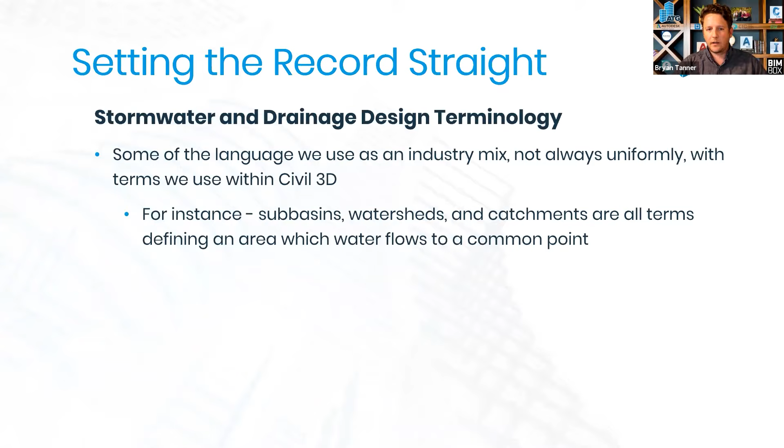However, all that said, we also have to think about our Civil 3D objects and the terminology that Civil 3D actually applies to those terms. In the case of catchment, a catchment is the object type that Civil 3D creates for a drainage area. And although I didn't specify it in the quick PowerPoint I put together, watersheds are an analysis style inside of a Civil 3D surface.

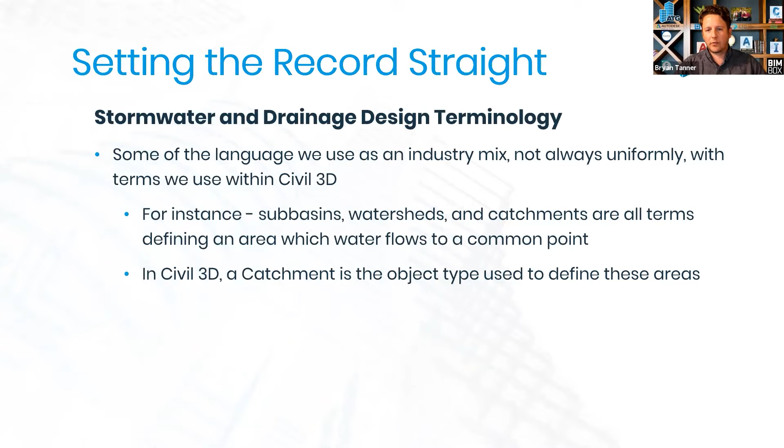So watersheds do exist as a term inside of Civil 3D, but it's a reference to a style used for surfaces, whereas a catchment is an actual object type with properties and settings that can be imported and exported to other analysis software for those drainage areas.

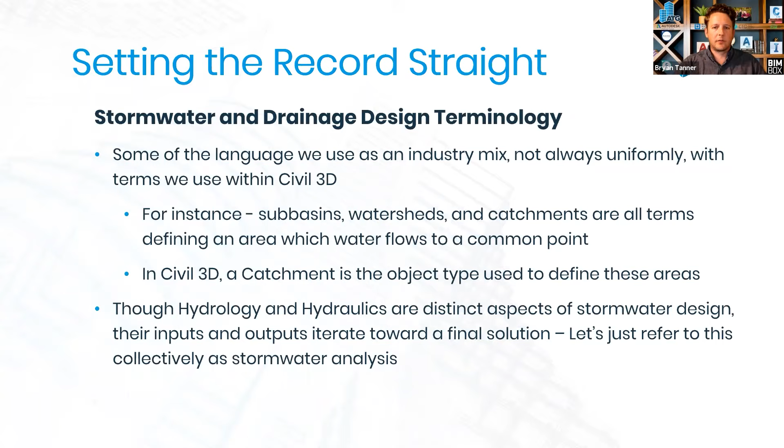Regardless of the kind of information we're talking about today, hydrology, hydraulics, this should all collectively, in my opinion and that of others on our team, and I'm going to credit Kyle Groves a little bit here, be known as stormwater analysis. Yes, some of it's flowing through pipes, some of it's runoff on the surface, but it's all going to iterate back and forth toward the same end goal of handling that rain event, regardless of where it's being collected from and outflowed to.

Now, Civil 3D itself can be set up to work better for us whenever it comes to developing these watershed areas, these catchment object types, and just drainage as a whole. We want to develop files that we can quickly export and for that matter, import to and from other design software, other analysis software. We've got Hydraflow, hydrographs, we've got Storm and Sanitary Analysis just within the Autodesk suite, just within the tools that are available to us with our existing Autodesk licensing.

InfraWorks is another one that we can tap into some analysis tools there for HEC-RAS and things of that nature. So we've got some tools available to us depending on our licensing structure within the Autodesk suite. Not everybody uses those Autodesk applications for their hydrology or hydraulic analysis. With that in mind, it's going to be a mixed bag. Your mileage may vary on the objects that we create within Civil 3D and how well they translate or transform between those other non-Autodesk applications. So keep that in mind.

We want to configure our template. We want to configure our drawings to communicate with as much other software as we can. And using the catchments and using certain settings within the pipe networks, we can accomplish a lot of that within our Civil 3D templates. We'll talk more about that as we go along.

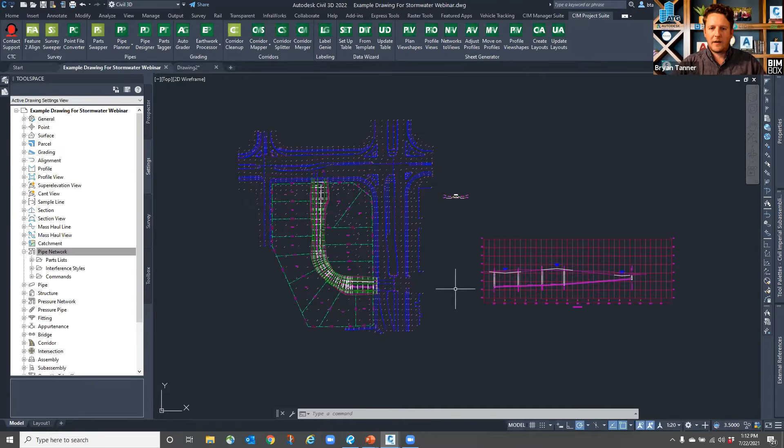Let's talk shop about the type of drawing we're in right now. Not a huge site, but we've got an existing site surface and a proposed finished surface in this drawing for a very basic corridor.

When we're doing our stormwater management design, depending on the regionality and project extents, sometimes we are also grading the site outside of the corridor. Sometimes our only part of the project is the site itself outside the corridor, and other times we have blended existing and proposed conditions.

For the sake of this webinar and the types of procedures you'll run into while doing stormwater design, we're actually going to paste our existing and proposed together. Why? Because ultimately that is our finished conditions. If we're going to analyze the entire site, we need to understand not just what we're constructing, but the areas outside of that which are contributing into our project and out and away from it.

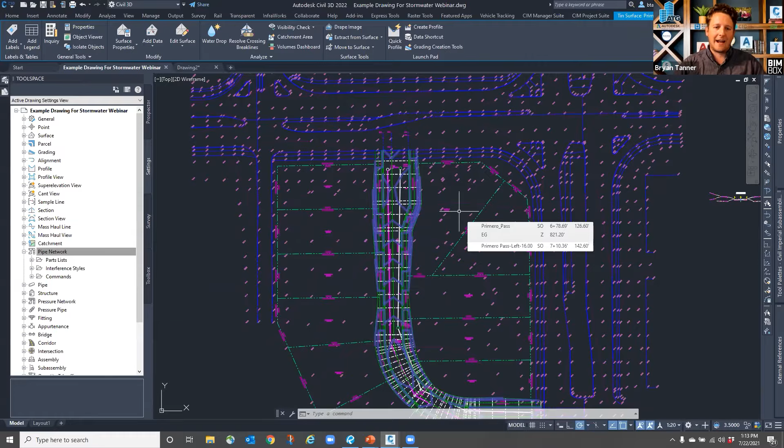Again, depending on the type of project and the area you're in, we may have different requirements on what we're including in that analysis.

So the first thing I would do in a drawing, and mind you, we're not working in a template. We are using the ATG starter template and the styles included in there on this data set, but we're not starting from scratch. We could spin our wheels quite a bit trying to start from survey field to finish and then design and then start our watershed and catchment creation. So admittedly, there is some level of completion baked into this.

What is not baked into this, what I specifically pulled out, is the creation of certain styles that are going to help us out along the way. Because while our ATG starter template is great, I didn't want to pre-bake too many things in that we need to learn about through the webinar.

So the first thing I may do in this drawing, so I have a complete picture of what my drainage conditions are going to be, is make sure I have a complete composite finished surface. On my Prospector tab under surfaces, I have an EG that's probably out of date or needs some changes, but I'm going to create a new container surface for my composite finished grade.

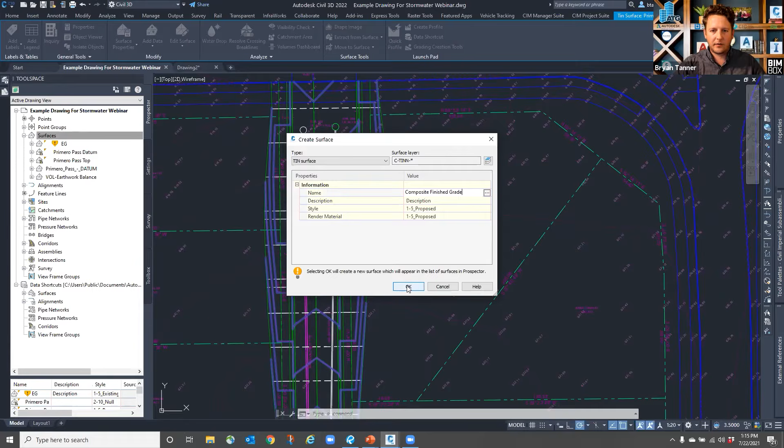Name things as descriptively and consistently as your organization needs. Add descriptions where needed. I'm going to go ahead and flip this, and I'll leave it at the 1 to 5 foot major and minor increment style.

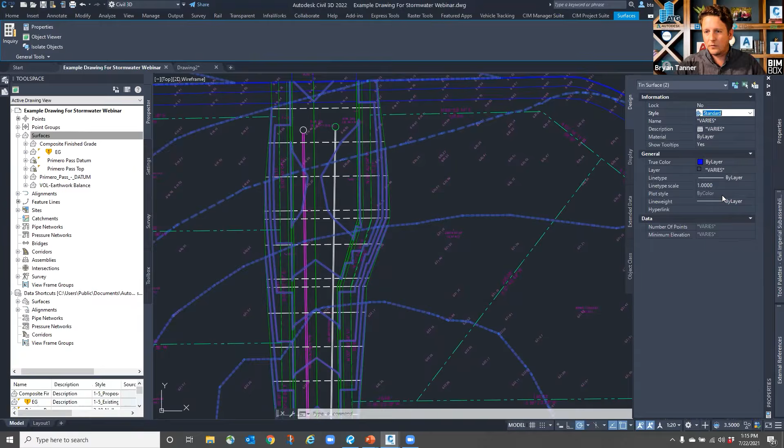I'm going to go ahead and turn off my existing and proposed surfaces to a no display style. If I had one, I may have removed that in preparation as well. So I'm just going to go to standard and modify that - actually I won't need to, because it's just the boundary and we can work with that.

So I'm going to take that composite finished grade surface, and the first thing I'm going to do is paste my existing and proposed surfaces into it. I'll expand the definitions, right click edits, paste surface, and choose my EG and my top finish grade surfaces into that. Luckily, with the order I selected them, everything came in the way I would expect.

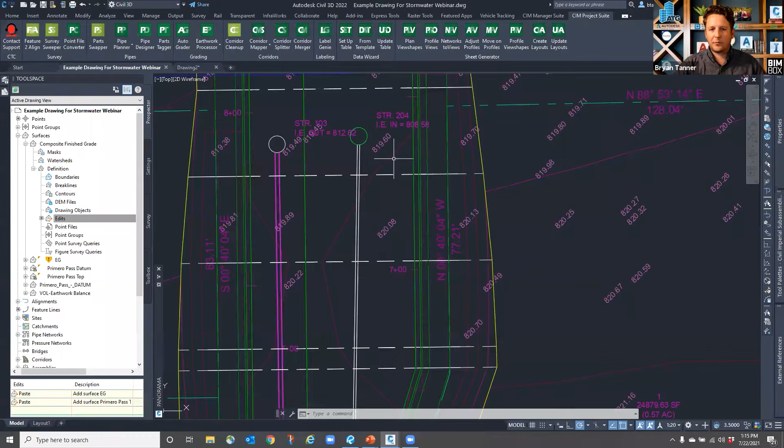Where I have design, my design surface takes precedent and I see those design contours. Outside the limits of my design, I pick up the existing contours. If that's not the case - if you pasted those surfaces in and for whatever reason all you see is the existing - it's because the construction order of your surface is not correct.

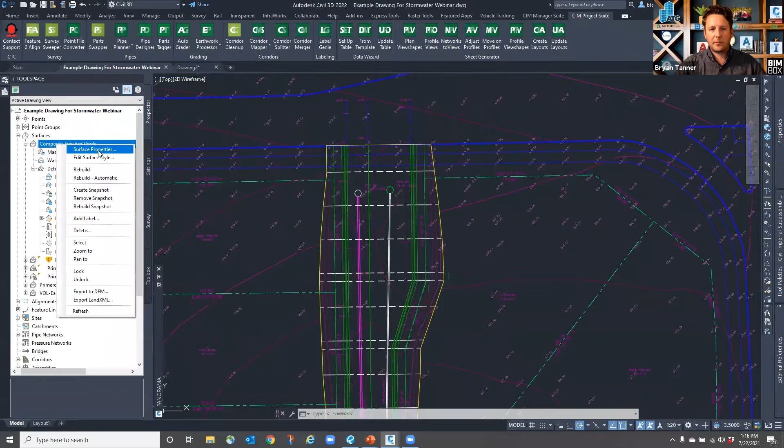So just to cover all our bases, if I right click and go to surface properties, or select the surface in the drawing and go to surface properties from the contextual ribbon, I can go to my definition tab and ensure that the last thing constructed takes precedent over what was operated before it. My design surface is at the end of the list, so it's working the way I want.

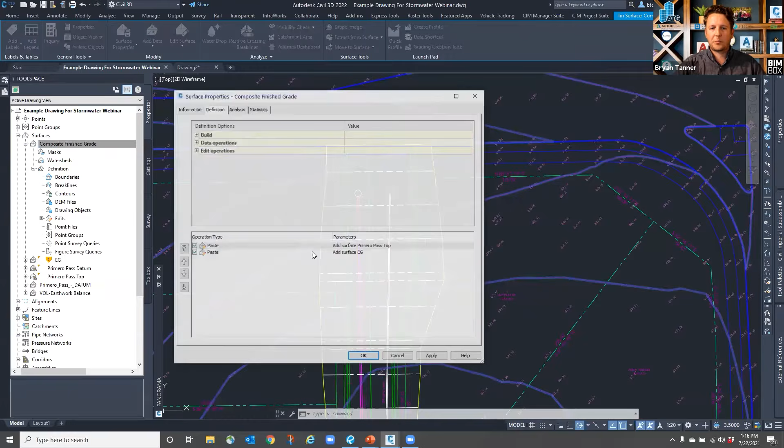But I'm going to shift it for a second just to show you how this could have been done wrong and how we would resolve it. We'd go back to the surface properties and change the paste order of those surfaces to ensure we actually represent the finished constructed grade of our site.

Now we've got a great site. We've got a great finished grade surface that we need to develop some stormwater design off of. From a previous webinar, I do have some stormwater designed in here. Is it designed at the right location?

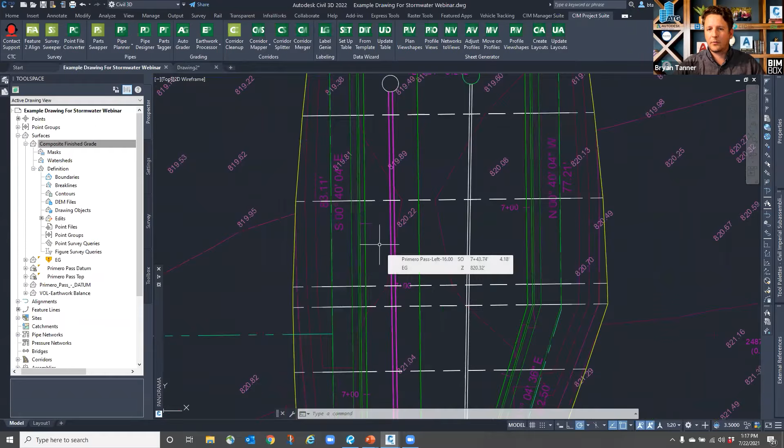I can tell you just by looking at the contours, if this was my finished design for the corridor, no, it's not at the right location. I need an inlet over here, and probably down at the other end of the corridor some other low spots needing inlets to collect stormwater runoff. But for today, I'm not going to mess too much with the actual stormwater layout. We're going to talk about surface runoff and determining where our pipes need to be assigned, and how to calculate catchment areas, volumes, and time of concentrations.

So with that surface active, I need to find where my drainage basins are. By definition in Civil 3D, I need to find where those catchments are. There are a few ways to go about this: we can either create a catchment object or create a watershed style.

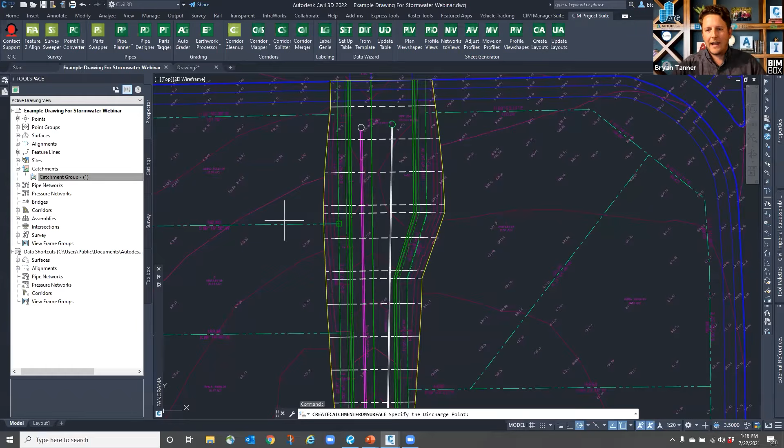Civil 3D has the ability, from the Prospector tab under Catchments, to create a catchment group. I'll create one as a quick example. After the catchment group is created, we can right click and create a catchment from surface, and it will automatically analyze that surface and try to find all of your basins. The problem is there are a lot of assumptions being made — we're already being prompted to specify a discharge point, but we don't know where that is yet. It's assuming information we don't have available.

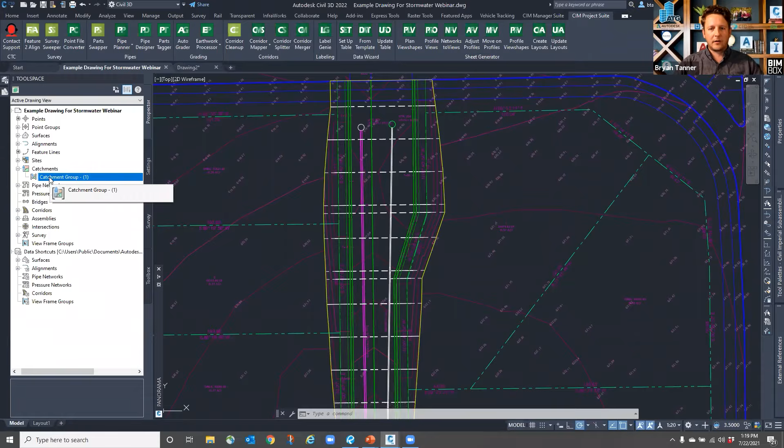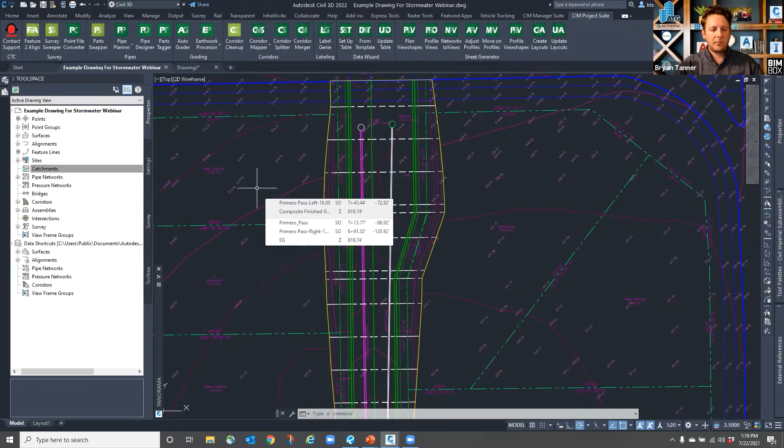So I'm not a big fan of creating catchments off of surface information unless I've already done some preliminary exploring and digging into the actual surface data first. I'm going to delete that catchment group for now and not create my catchment object from the surface. Instead, I'm going to do some prep work so I have better data to work off of for my catchment objects, my flow lines and flow paths specifically — developing some tools and using analysis styles of my surface.

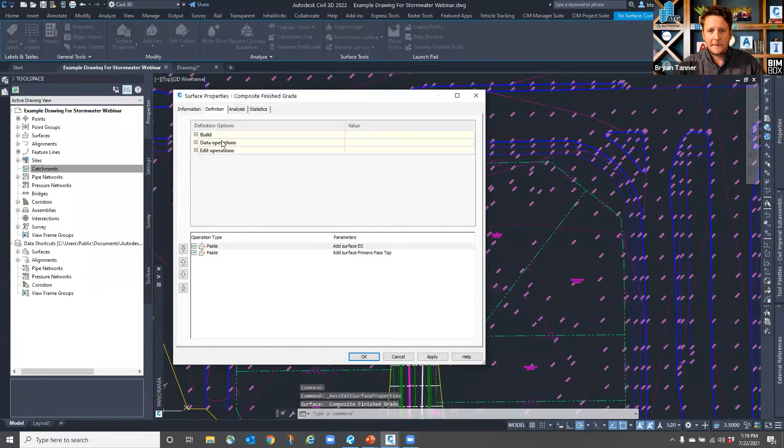First things first, I'm going to select my surface, and with that surface I'm going to go to surface properties. Inside surface properties, you may have seen the analysis tab open a moment ago. On the analysis tab, if you've never used it before, we've got a lot of options for exploring and visualizing the data of our surface in ways that allow us to make better design decisions.

So I'm going to change it to a watersheds type, which effectively runs that catchment area automatic surface creation process, but in a way that creates a style I can use to inform the actual decision on where my catchment areas are.

With the watersheds analysis type active, I really don't care about the legend at this point, so I'm not going to create one. But I do want to see where my depths are, and whether I have adjacent boundary watersheds that should be merged together. I'm not going to edit those — I do want to see all of my watershed areas, even with those exceptions.

So I'm going to process my analysis. I am going to modify it because we see a lot of boundary points — single point pieces of information and boundary segments. This takes care of some edits we could have made, but through, in my opinion, a simpler interface. I don't care about boundary points or boundary segments; I care about the depressions, the flat areas, and the multi-drain areas. If it's inside my project, I'll want to correct those multi-drain areas, but we'll talk about that in a moment. So if I want to limit my watershed analysis down to just the actual drainage information I need...

I can click this light bulb icon as part of the range details, and get rid of the boundary point and boundary segment information. It updates my list — we see those are all turned off uniformly. Whenever I click OK, my surface is now displayed maybe in the correct style — definitely not, because I've run the analysis but I don't see the analysis. Why not? Because even though I ran the analysis, I don't have a watershed style active.

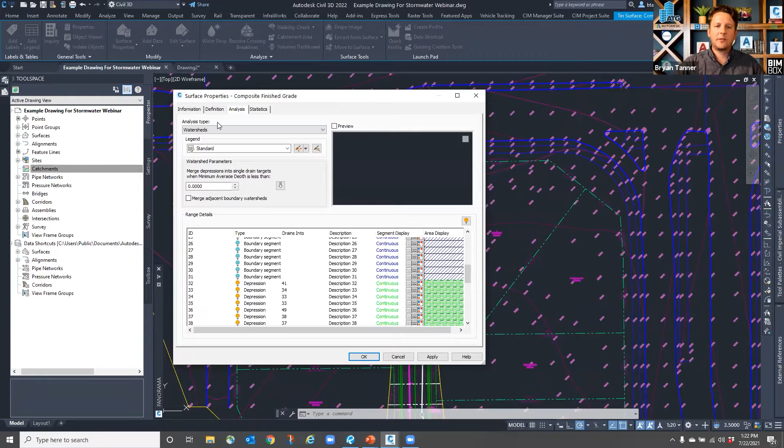I set up the configuration for it. If I go to Watershed, we can see that my configuration is still held inside of the surface data, but I don't have a visual display of that surface to visualize this information. Well, I do that back on the information tab. I'm still looking at that surface as 1 in 5 contours that I set earlier.

So I either need to edit or I need to create a new surface style. Let's look at our list. It doesn't look like I have any surface styles that are going to accommodate a watershed type analysis. So what do I need to do? Create new.

So I'm creating a new surface style in this drawing. Mind you, if you use it in this drawing on this project, you want to make sure that style gets back into your template so you have it available for future use. But first things first, I always go to the display tab.

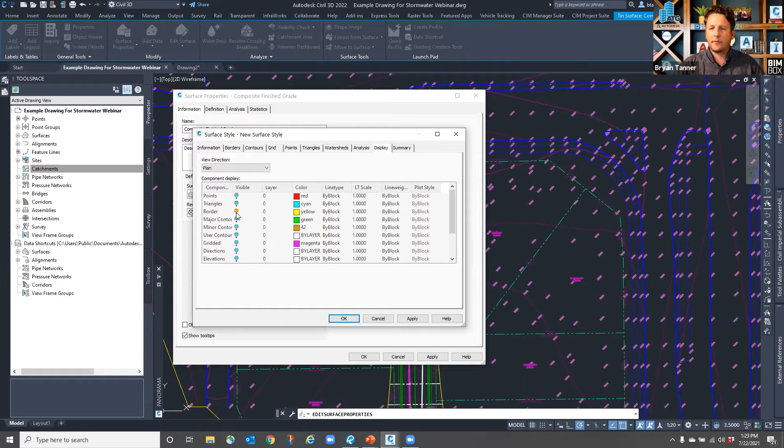I want to know what I'm seeing. I want to see those watersheds. And for that matter, I'm okay with seeing the border, the overall border of the surface, but I could turn that off if I wanted to. I'm going to look at my Watersheds tab then so that I can pinpoint down how my watersheds are styled to match that analysis that we just developed inside the surface properties.

So we can look at the boundary point, the boundary segment settings. We're effectively ignoring those as we identified before with that light bulb. But then what the depressions and the flat area styling is going to be like. We can modify the styling here to override what the analysis processed earlier.

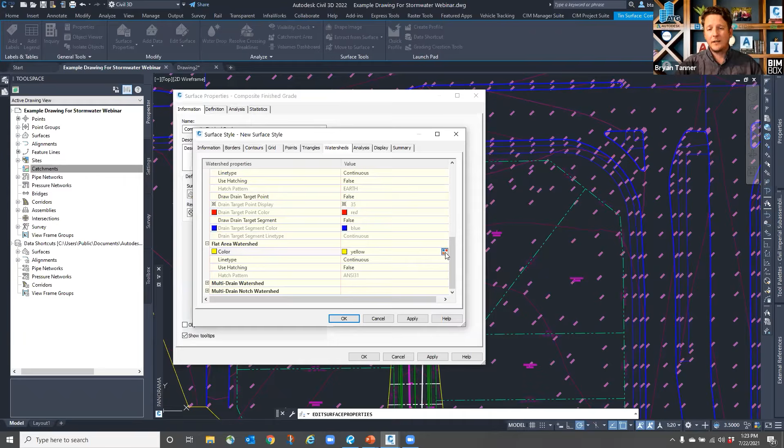These are the out of the box options, so they're going to match right now. But if our flat areas were of a major concern, we wanted them to pop, and we already use a lot of yellow line types or layers in our drawing, we could easily switch this to a different color style. We could use hatching to identify those flat areas and determine which kind of hatching was used for those flat areas if we needed to, and change the scaling and everything else.

So just like any other style inside of Civil 3D, our watershed style can be tailored to fit our needs and what we need to show on plans. I think that's even the more critical aspect of it: if you need to show your watershed analysis before you ever do a catchment, before you ever do an analysis, before you ever actually calculate anything in a separate supporting software, if this is something that you need to include on a plan sheet, we can style it appropriately here. I just made one quick change to that, but we're going to see how those all apply, multi-drain, et cetera. There's going to be some more options there that we need to pay attention to.

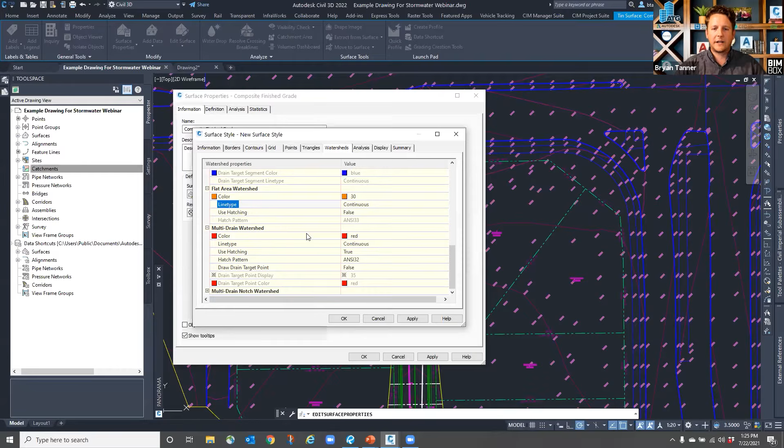Actually, the one thing I will pull off is these flat areas. I'm going to switch that back to no hatching, just so that we stay hyper-focused on maybe some of those multi-drain watershed areas as a point of focus.

So, okay, new surface style, dang it, that's my bad. I should have done a better job of going to that information tab and ensuring I created and named appropriately a watershed surface style.

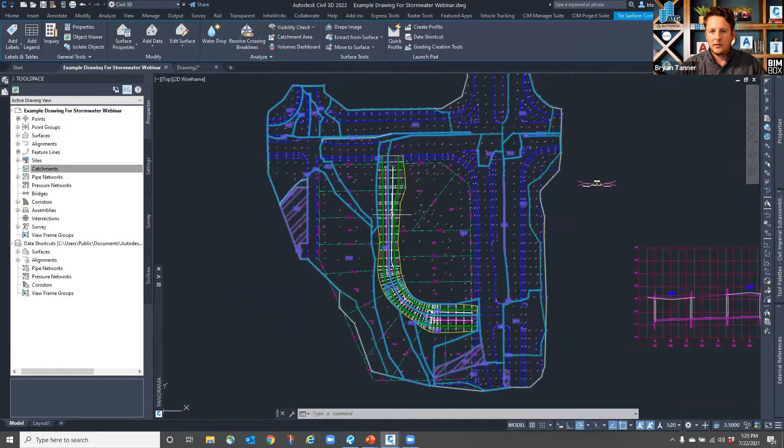What do we have now? Well, we have a surface that is using a watershed analysis with a watershed display style. What good does that do us? It actually does quite a bit of good. We can see what water from what areas of our drawing are going to end up at low points. Do we know where those low points are right now?

Not really, because we don't have contours turned on. We're not looking at any kind of elevation detail. We just see the overall boundary. We can tell what kind of depression or flat area it is based on the boundary layering that was used in the watershed style. We can even see where those multi-drain areas are.

Now, this is where I'm going to jump back to the PowerPoint for a quick second, because I think we do need to identify what a multi-drain is. And to their credit, Autodesk has developed a great description and a great graphic for what a multi-drain watershed is inside of Civil 3D. It's effectively identifying where two areas butt up against each other, and they are effectively flowing into each other in micro drains, more or less.

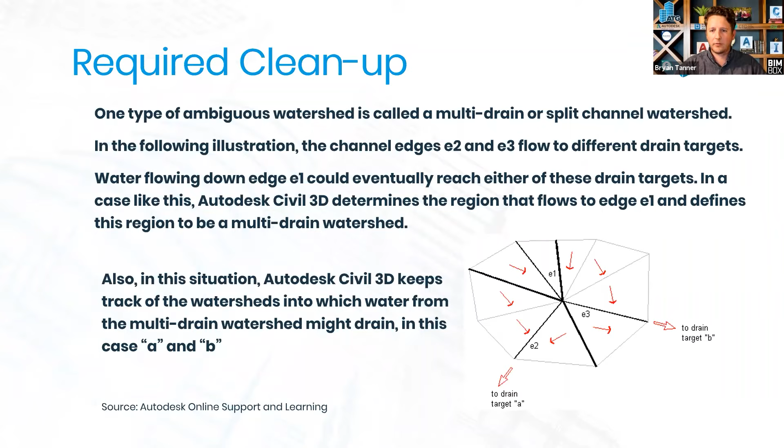So jumping back to Civil 3D, we've got a couple of those micro drainage areas or multi-drain areas. Now, in this particular instance, those multi-drain areas are outside of our project site. We are not responsible for them. But when you do have those as part of your project site, as you may have through several different grading groups, maybe where two grading groups meet, you will need to resolve that so you end up with positive drainage to an outflow or an effluent location. So keep that in mind.

One of the things that I will emphasize that we're capable of doing inside of the surface that we already have in here is we're displaying that surface as a watershed surface style. But as soon as we change this surface to a different style, we lose that great watershed information. It is purely just a style. Yeah, we could create another surface. We could copy and paste a new surface, or just use the new shell surface and paste this surface into that.

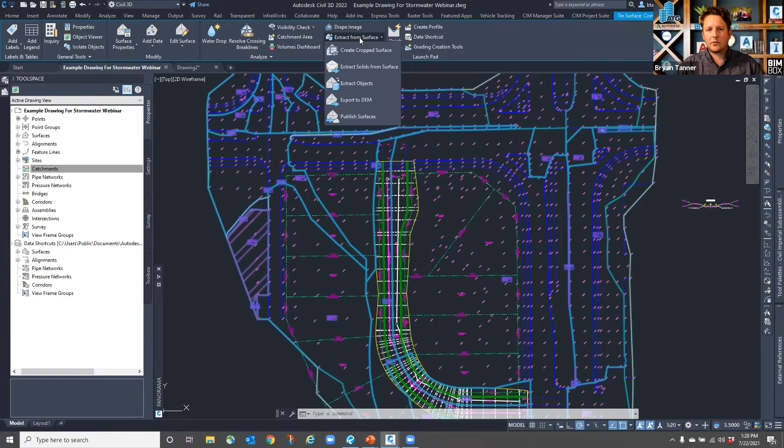But for fullest extent of understanding what capacity we have, I want to highlight a tool that I use a lot in just regular Civil 3D training, and what we need to use sometimes for shrink wrapping surface boundaries and maybe exporting to other software, is our ability to extract data from a surface. Now, you can only extract data from a surface that is displayed currently. We just happen to have watersheds displayed currently, so I can go to my extract from surface dropdown in my surface contextual ribbon and extract those watersheds.

I don't need to worry about the border right now. I'm just going to worry about the watershed itself. So we've got that available, and I'm going to use the OK. And it looks like nothing has changed in the drawing. That's fine. It looks like nothing's changed, but I assure you something has changed. If I escape out of the command, contextual ribbon's gone, the surface is no longer selected, I now have 3D polylines everywhere that I previously had just a surface style for those watershed areas.

We also get some labels depending on how we configured that, or we definitely get the hatching out of any of the watershed styles that happen to have a hatching applied to it. And we can use those to our advantage later on. So we can change the surface display style. I can go back and select that surface from a list, or do a shift select to pick that surface out from the drawing if needed.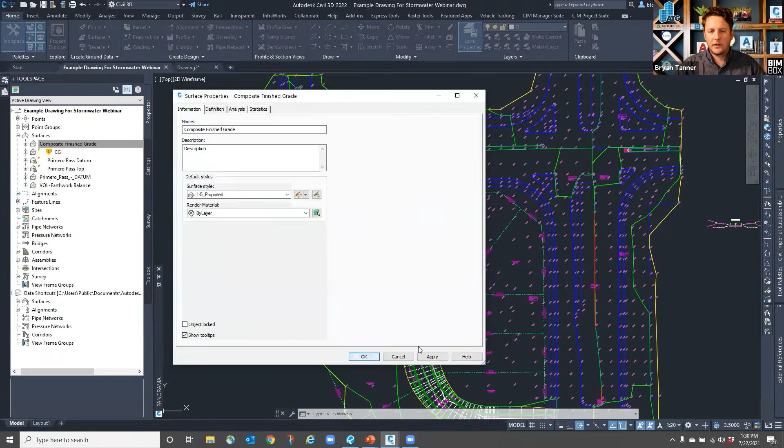But I'm going to go to my surface properties, and I'm going to change that back to a 1 in 5 just for a moment. 1 in 5 proposed surface. So now we can see our watersheds and our contours at the same time. The one thing that might become ideal is combining watersheds in certain scenarios, because we are going to manually create our catchment areas based off of objects in our drawing.

To do that, we can combine those through, I think there's a custom command, line work shrink wrap. I'm going to try it. It's been a long time since I've used it, but if I needed to combine two catchment areas, I'm going to use line work shrink wrap. There's the autocomplete for it. And it wants me to select the objects to combine. So there's one catchment area. Here's another catchment area. I can hit enter, and I should just get one large boundary around those two objects as they existed.

You could continue to iterate on that line work shrink wrap to grow a much larger boundary over, let's say, the parent boundary or parent catchment areas that you wanted to define. But I'm actually going to step back a couple steps to get rid of that.

There we go. Okay, so I'm back to my individual catchment areas, but it's a tool that can be very handy whenever you're presented with that need to combine your watersheds into an individual catchment area. All right, so we've got our watersheds defined. We've got them as static objects that we can use to our advantage. That also means that we can style them to our advantage.

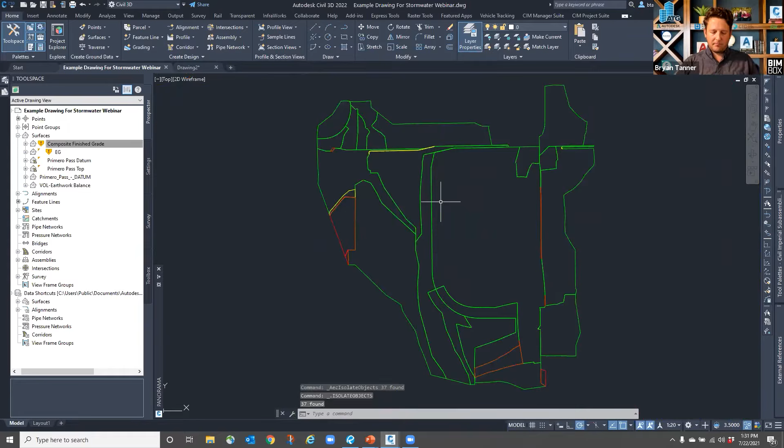Even though they're utilizing a different color, they should all be on the same layer, just by the way of how they were defined within the surface style. So I'm going to make life a little easier here, and I'm going to select similar all my catchment areas, and I'm going to isolate those selected objects. Why am I doing that? Because I'm going to do a couple things to this so I can manipulate them or visualize them a little bit more easily.

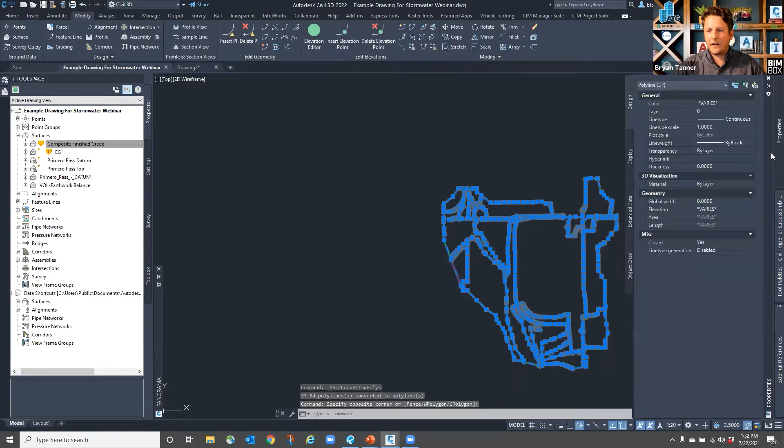They're all 3D polylines. If I go to the Modify tab of the ribbon on the Design drop down, I can convert them from 3D polylines to 2D polylines. And once they're 2D polylines, I can provide them with a global width. And that's going to make them stand out and easier to select within the drawing. And I may have changed some of the draw order through that process. I could go back and manipulate that. I'm not going to worry about it for the time being. Something I definitely would pay more attention to, the draw order of those flat areas versus the multi-drain surface areas versus my positive drain areas.

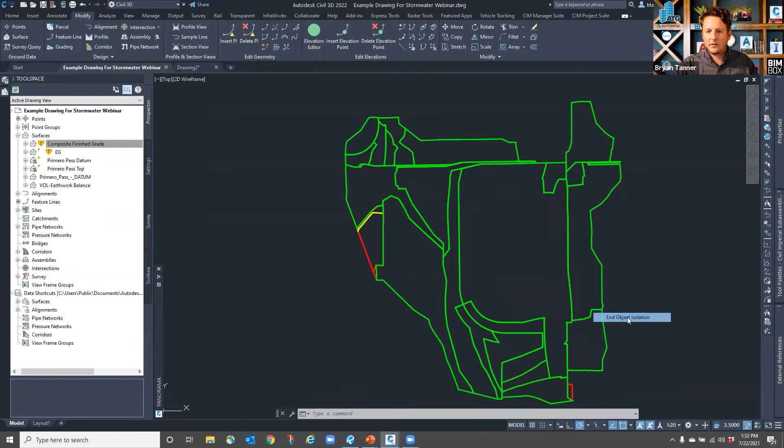But I'm going to end my object isolation. It'll take just a second to process and bring all that data back. But now I have a little bit easier to identify polylines representing those watershed areas. Going to make my life a lot easier for the next thing I'm going to do. The next thing I'm going to do is try to define where my low spots are, where my high spots are. If you can read contours, great. I've been doing it long enough. I'm pretty comfortable with that.

You may want to switch to yet a different surface style, an analysis style, to help out with that though. Surface properties, we'll go back, and I do believe we do have a TIN flow arrows option within this template, but just to explore that a little bit, I'm going to go in and edit that current style, make sure that the display is showing our triangles for our TIN, and that we also are going to see slope arrows. Anything that's an analysis type style is going to be on the analysis tab, and I can see those slope arrows and change how they are structured inside of our analysis style and how they're going to be displayed.

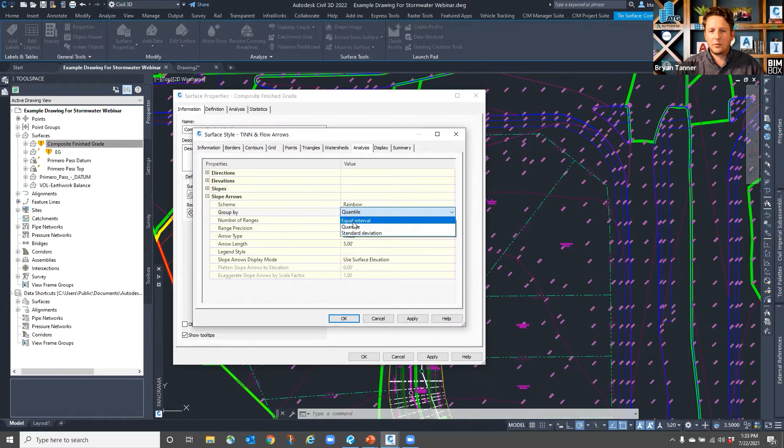I'm going to switch these to an equal interval. It's going to make life just a little bit easier for the sake of our time together on how many edits I need to make once I run the analysis. But I'll say okay, and I'll go to my analysis tab and find my slope arrow analysis type, run it. I knew I was going to only come up with 3, even though I have a range number of 8, but it's because of the method that I used inside the style. And I'm just going to change.

Obviously, we're going to have very, very small triangles on the faces of curbs that are at very, very large percentages of grade. We don't want that to be a portion of how our quantile or evenly distributed slopes are determined for these slope arrows that are going to show up. We may want to set more realistic ranges for 0 to 5%, 5% to maybe 12%, to where we get some of those more intermediate grade conditions, or 8.33 if you're looking for your 1 to 12 type of scenarios. And then just adjust those ranges to whatever that maximum range is at the end.

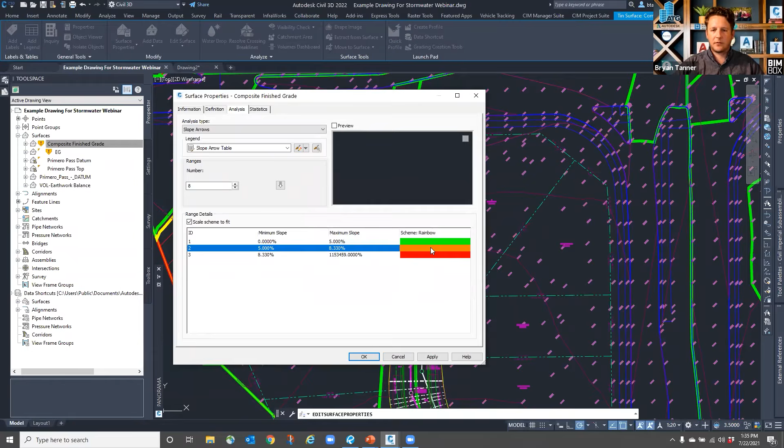We could certainly change our color coding. If it's a minimal slope, if it's nothing of major concern, we can find it. Not only is this critical for finding how dramatic our slopes are throughout the site, but it may be necessary, hint, hint, it most likely is necessary to determine your coefficients for your runoff and how that's going to affect your time of concentration. All right, and then these very high slopes, I'm going to switch to a red type. Actually, I'm going to switch this to yellow just to get it to stand apart a little bit.

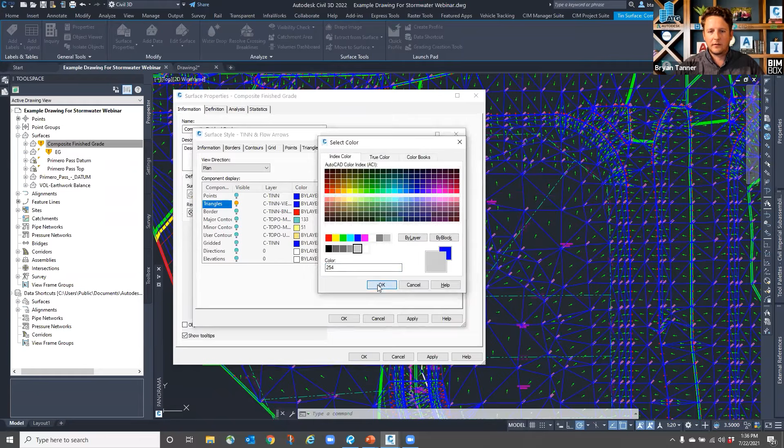And I'll say okay. So now my surface style is going to swap over. Actually, I'm going to change my triangle style because that blue is overtaking everything. I'm going to go back to information, edit my style once more to where my triangle layer in this particular instance is more muted and in the background, so I can really track my flow arrows.

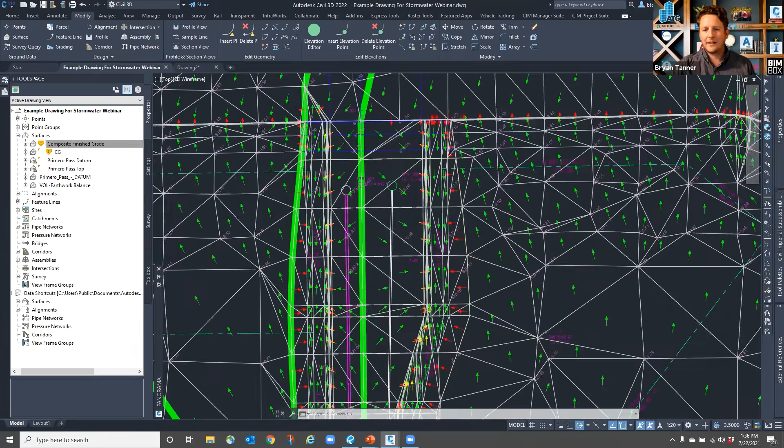So because we extracted our watershed areas and widened the polyline width to be able to see those jump out at us, it gives us a better idea of how the water is actually flowing, how the runoff is actually flowing on our site and in what directions. This is going to give us a key indication of approximately where the high points on our site are and where the low points on our site are.

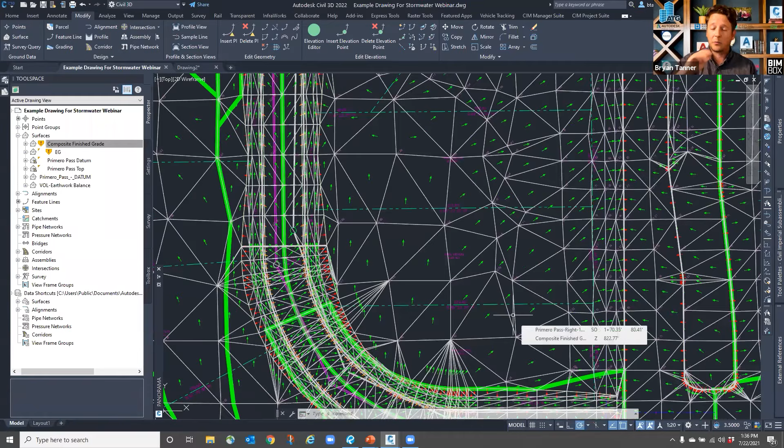This is not the final tool that we will use to determine that, but this will expedite where we are looking for when placing the next tool, which is a water drop analysis. You could use a water drop analysis 1,000 times on a site and still not find anywhere near your high point and low point. Well, you're going to find where your low point is, but not necessarily where your high point is.

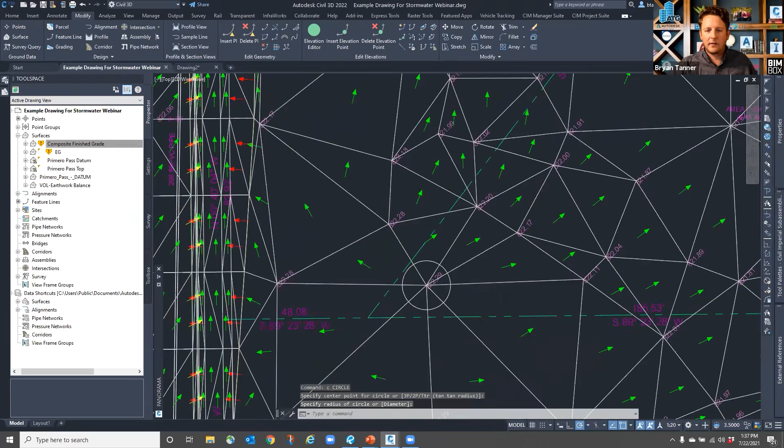So I use this watershed and flow analysis to determine within which catchment areas approximately where is my high point. And it's going to be somewhere right around in here, in this particular catchment area. And that circle got huge on me without anticipating it. So it's going to be somewhere in this vicinity that I'm going to end up with a high point in this catchment area. Maybe not, because we've got a little bit of a split in the flow on the site, but I'm going to use that as my basis of where I'm starting out with my next analysis tool.

So I'm going to switch my surface back to a style that's a little bit more reasonable, that I can use more readily, 1 and 5, without obstructing everything else on my site. And I'm going to use that next analysis tool. Now I can use that from the Analyze tab of the ribbon. I've got flow paths, or I can select my surface again, and we're going to see water drop here. So from the contextual ribbon or from the Analyze tab of the ribbon, the flow paths drop down, we have a water drop tool.

With the water drop tool, it's going to ask me to select a surface that I'm going to be dropping the water on and seeing where the runoff goes to. So I'll select that surface contour that represents my combined or composite surface. And I want this to jump out at me. I don't want to just have things on layer 0 within my template, but in this particular drawing, I want to set a specific layer for my water drop.

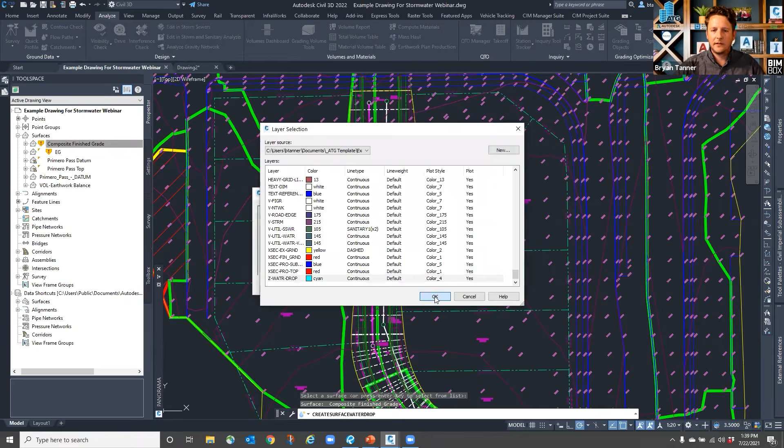So going back where it says path layer 0, I'm going to click the ellipsis, go through my layer list. I don't have a layer specifically defined for analysis yet. I'm going to create a new Z analysis water drop layer, and I'll put that on a cyan color. That's key. I'm creating a layer inside the command without having to get out of the command completely. Say okay. It's going to be a 2D polyline. That works to my advantage for later on compared to a 3D polyline.

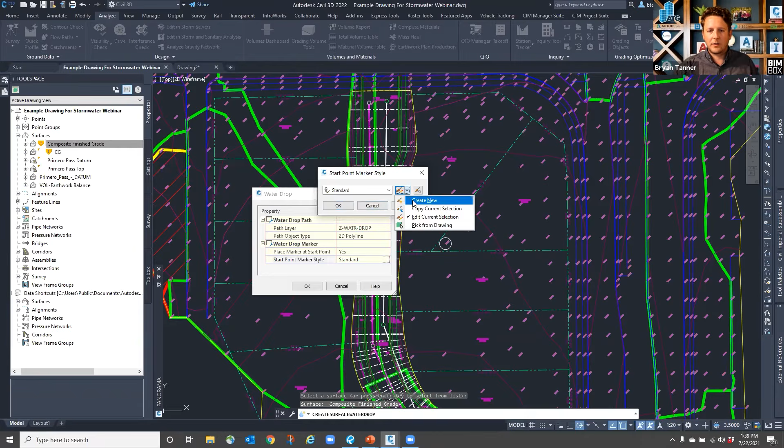Do I want to place a marker at the start point? It will make it easier to find the beginning and end of your water drop analysis. So I will say yes, but I'm going to create a new point marker style for that. I'm just going to create a new one, call it my water drop point. Marker is just going to be a basic X, and I don't want a label. I just want to place it on the same layer that I'm doing my water drop line work analysis, and make sure that it displays properly. So okay, okay, okay. And now I'm actually able to start doing my water drop analysis.

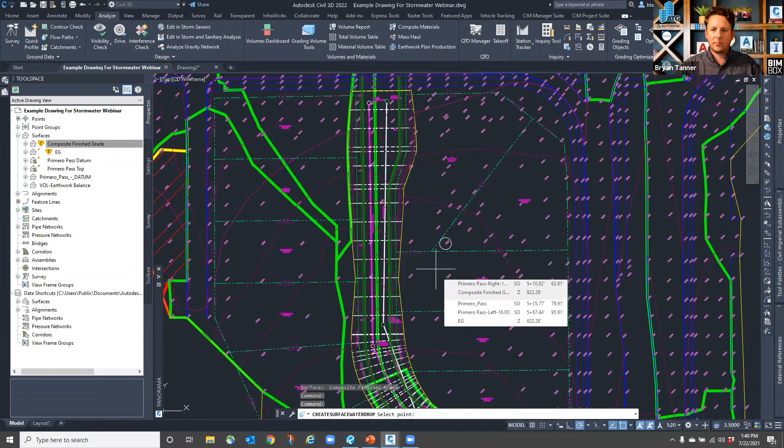The key part when we are planning on developing a catchment inside of Civil 3D is you're trying to find your longest path, from your highest point from the water drop analysis to your lowest point or your effluent outfall location. So when going through this process, we want to find that high point. That's why I used that slope arrow analysis before. And if I'm right here or near there, I'm going to be pretty happy with what my guesswork pointed toward.

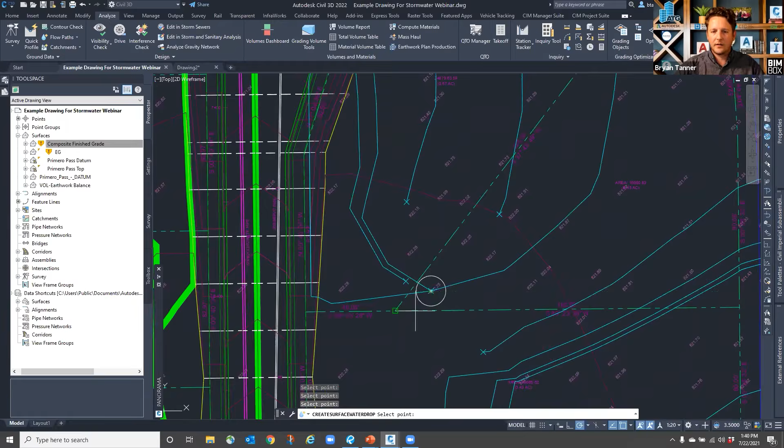But I can use that water drop analysis 1,000 times, and it's going to help me define where my high point and my longest path is on a site. That's a good indication whenever you've got a path that splits into multiple directions, but it still ends up at a single outfall location.

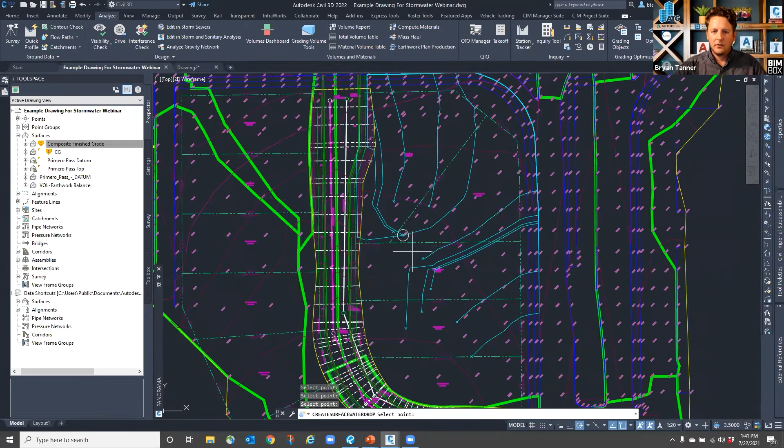That's a great indication of where your catchment is going to drain toward. Again, this is predominantly just the existing contours that we're seeing out here, and then just a little bit of how our proposed grading is tying into those existing contours, leading to a drainage location. So we found that high point, or in some cases just the longest path of our drainage, depending on what your actual goals are with the catchment.

I'm only focusing on this one watershed area specifically because it would take time to iterate and build this out for everything. It doesn't take long, but longer than we have together today while I explain the use of the tools. So I will escape.

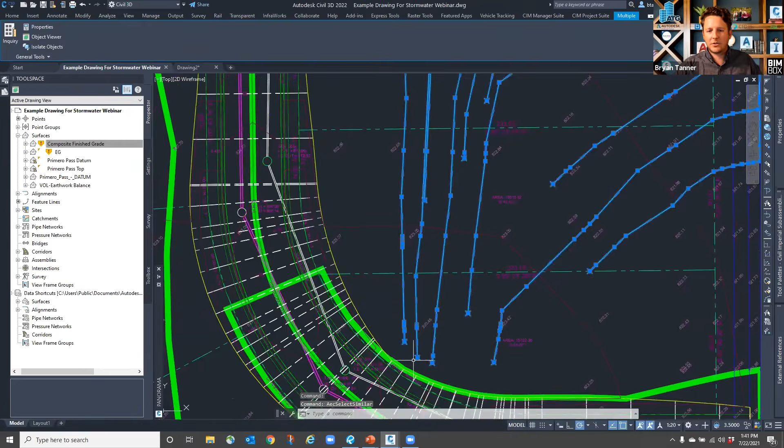Once I find my highest point or my longest path, I can simply select my point, my lines, do a select similar, and just make sure that I do not get rid of the path that I intend to keep and use for the calculation of my catchment for my flow path. This may not be the most ideal path, but it's the one I'm going to use for our time together today. One, to identify the path, and two, oh, there's actually my low point, to find that outfall location.

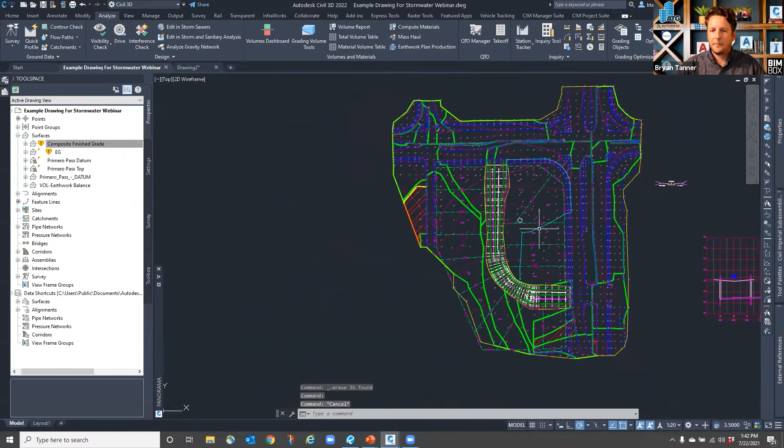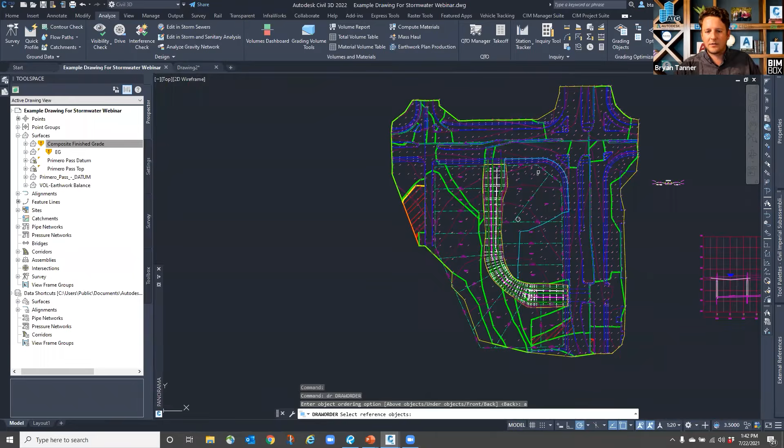All right, so if I've got the objects that I want, and I do now, I have my path, I have a catchment area that I can use. I just have to make sure I use the correct selection. There we go. There's my catchment area. I'm going to actually use my draw order to bring that to the top. I'm going to make that above all objects. It just should make it a little bit easier. Oh, I did not choose the correct option there. Draw order to front. There we go. So that's going to make my catchment area easier to select from that watershed boundary.

So now I have the objects necessary to start doing my catchment analysis. I can do that from the Analyze tab. I can go to Catchments. I can create a catchment group. In this case, I would create a catchment group with many different catchments in it for my proposed design, the existing, and anything that's going to be impacted by my project to organize everything. Catchment group, I'm just going to say, is ATG as part of our webinar.

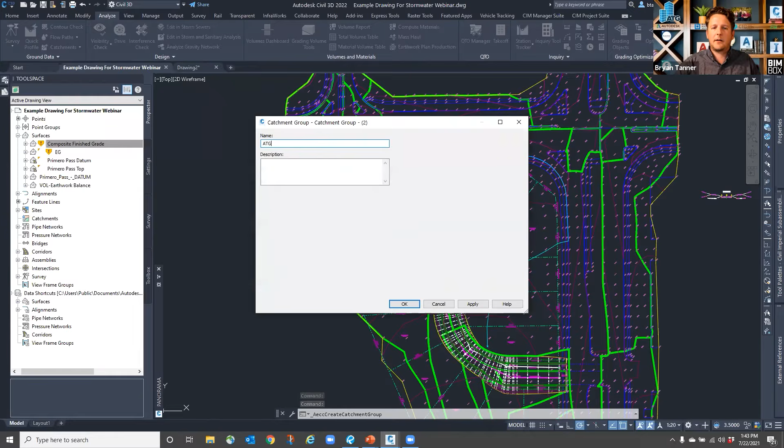And within that catchment group, I could continue to work off of the Analyze tab of the ribbon, or at any point in time, I can right-click and choose the options from within the Prospector for creating a catchment from an object. Again, we avoided the create catchment from a surface because of some of the assumed issues that may come along with that, and because of our ability to combine watersheds into a larger catchment area or refine those.

Sometimes our geometry is just weird because it's following a triangulated irregular network for a surface. So we could have taken the time to take these 2D polylines and weed some points, adjust some of the little nooks and crannies on it to simplify it a little bit, and worked toward our benefit. That's the reason why we didn't use that create a catchment from a surface option. Good, just not perfect for the types of uses that I need it for.

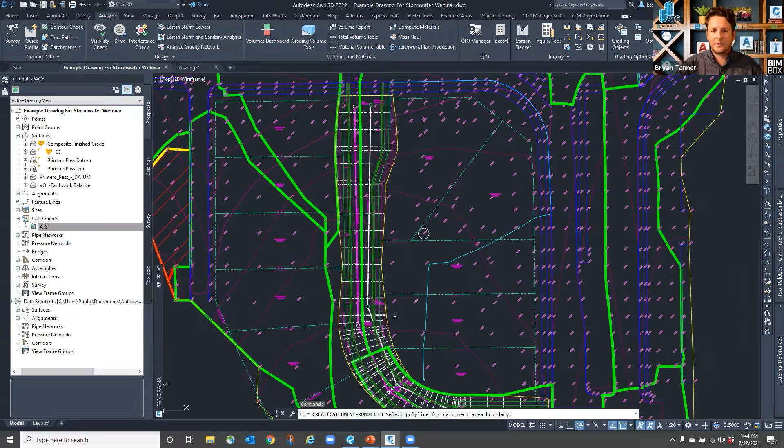So I can right-click, or I can use the Analyze tab of the ribbon under the Catchments command button. But I'm going to create a catchment from an object. What's the polyline that defines the catchment area? Well, I moved that to the top earlier. There's my catchment. Select a polyline on the uphill end to use as a flow path. Well, that was the whole reason that we used the water drop analysis, because now we do have a flow path that can be selected in this catchment area.

Now it brings us to the Create Catchment from Object dialog, and I can name the catchment area. I'm just going to call this Primary East, because theoretically on this project, I may have up to 3 catchment areas for my low, high, and my corridor areas. What group it's going to belong to, what pipe network structure, if any, we are going to reference and utilize.

Again, I'm not going to use the pipe network in here unless we have just a little bit of time, and I can see we're already running just a little bit short on what I would like to cover. So I'm probably going to leave the pipe network out, but I would select the network. I would select the specific structure that happens to be inside that catchment area that I want everything to drain to, ideally at that low spot.

What's the catchment style? Well, we don't have any catchment styles defined in this drawing. There were, I stripped them out, but we would define a catchment style for how we want that to display. I'll just call it ATG, display on what layer, C-CTCH. It's going to be kind of plain Jane right now, but maybe I'll change it to bright orange so it stands out for us for the catchment boundary.

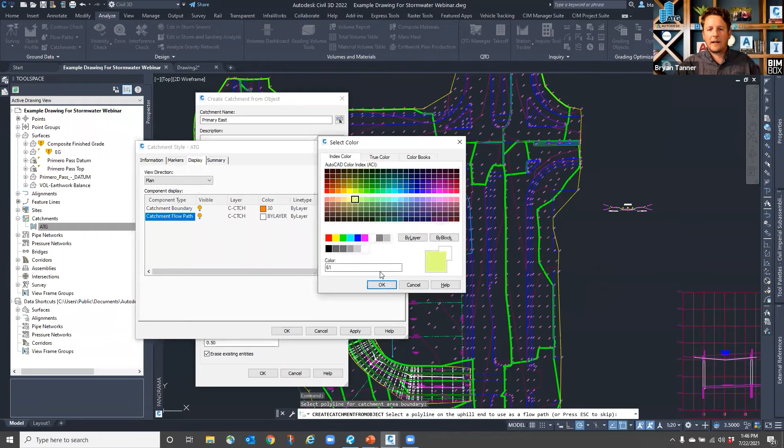And then maybe for the flow path, we use just a slightly different green or something like that to make it stand out. I'm going on the fly here. These are not the design standards that I would normally use. And then we have a new catchment style that's going to be displayed once the catchment's created.

What about the catchment label? There's good information from the catchment data that we may want to reference and be able to just see at a moment's notice and glance at our drawing to find that information. Additionally, we pulled these watersheds from the surface, and I talked about using those on a plotted set of plans, but at the end of the day, you may just want to show the catchment object itself, styled appropriately, labeled appropriately on your set of plans.

So we can absolutely address what those labels look like here, so that whenever you've got your stormwater management plan, it's already styled to display correctly on those plans. But we could spend another session at another time talking about all of the idiosyncrasies of label components and things of that nature. Just realize that within a label component, there's quite a bit of data that we can pull from the catchment object itself that can be included in the label that's displayed.

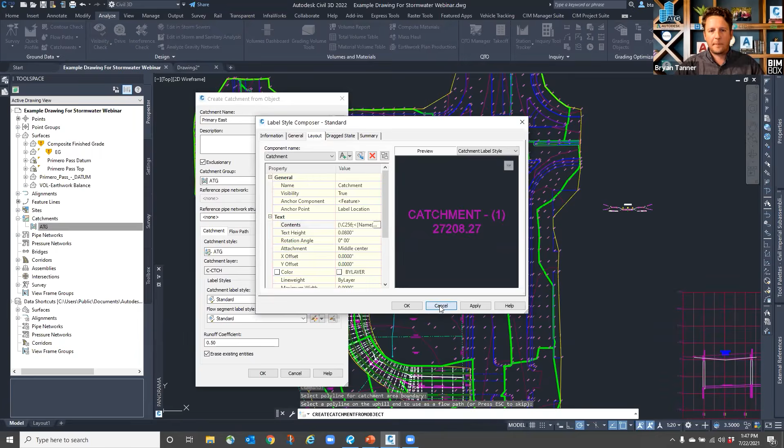So without going too in depth about all of those components and how you can configure the offsets and text size and fixed or static text versus dynamic text and things of that nature, that's for another webinar at another time. Same thing for the flow segment labels versus the catchment label style.

Before we get completed with this, yeah, there's a runoff coefficient. Unfortunately, this is going to be just the one value that you can assign to this catchment area, the average runoff coefficient for the entire catchment. So if you've got asphalt, grass, tall grass versus wooded area, and you've got different coefficients within the Civil 3D object types, you either need to break those down into smaller catchment areas that identify those coefficients differently, or do what some regions allow, which is average based on percentage of use, what those coefficients actually are within that one catchment area.

So if you've got 50% asphalt versus 25% grass versus 25% wooded, you would find that composite value of the runoff coefficient and establish that here. I am not going to erase my existing entities, because in my particular example, I've already defined the boundary the way I wanted it with the watershed style and the extraction of that polyline.

But you could, once you've used those watersheds to extract the data and create your catchment, absolutely get rid of that watershed boundary and just use your catchment styling to address the way it looks on the set of plans. But we also want to make sure that we don't miss this flow path tab. The flow path tab is more of a check than anything, because inside of Civil 3D, the only calculation method that we have is TR55.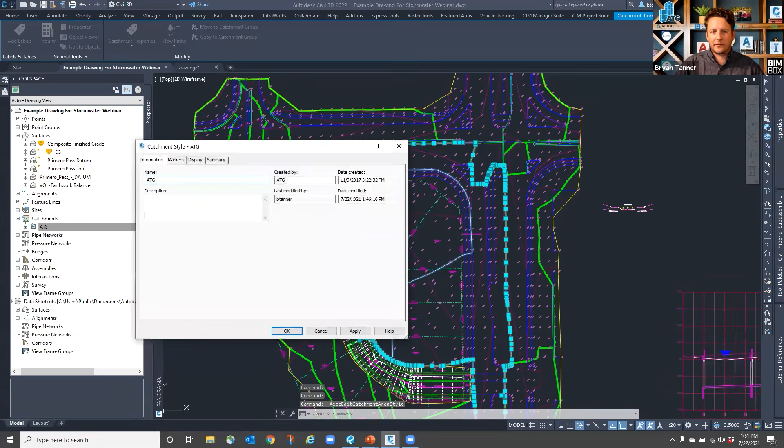Lastly, we need to think about how we connect this data from the catchment we just created. Let me go back, because for catchment properties, we have the style itself, and then the catchment properties dialog to visualize and edit some of those values, and also see what the actual analysis was—the distance of that hydraulically most distant flow path, the length, and the area being determined.

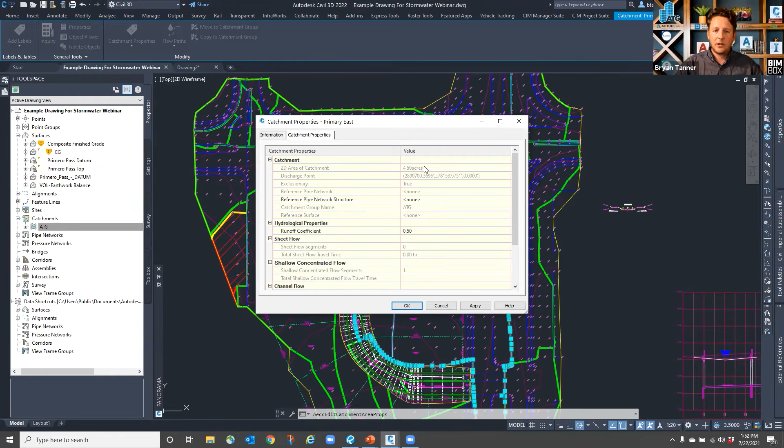These are uneditable features in some cases because that's just part of the data. If we redefine the boundary of the catchment, that data would update. So we've got those properties, and we've also got the editor itself. If I expand, we can right click and go to those same properties from the prospector, or the editor itself, and then look at the Analyze tab for how we're bringing this in and out of other software.

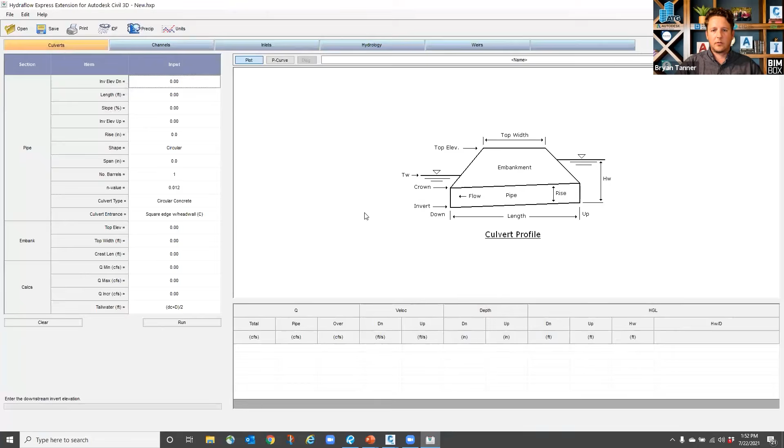One of the things we can do is time of concentration. We can expand our design panel of the Analyze tab, and launch the Hydraflow Express tools to calculate what those catchment areas are. It's going to look at that information, look for our hydrology, and allow us to define the method used and pull that information from inside that catchment or multiple catchments we've utilized.

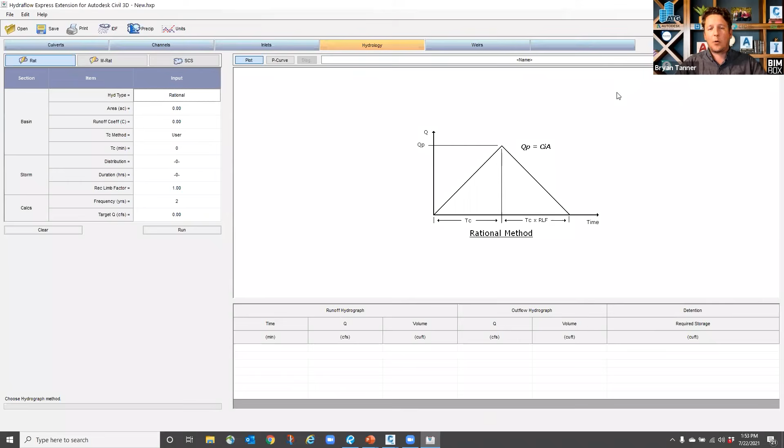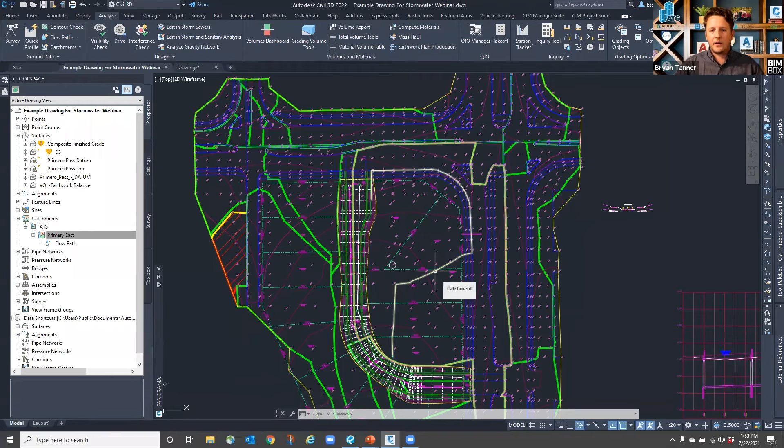Again, this webinar is not intended to be about that. There's obviously an entire session, hours plural, that could be spent on how Hydraflow, hydrographs, storm sewers, and other analysis plugins or applications could interact with Civil 3D. But the data we needed to define is already configured for this catchment, and that could be repeated for multiple catchments.

The other thing that needs to be configured in Civil 3D, if and when we export this out to Storm and Sanitary Analysis, for everything to connect, is our pipe network part matching. For that, we would need to go to the settings. In our template, we would define this not on a per-project basis, preferably, because it is time consuming—you only want to do it once and have it carried forward in perpetuity.

We would right click our pipe network node, edit feature settings—that happened to pop up in my other screen—and then expand to the part matching information we actually need to assess. Storm sewers, migration defaults: what are my part matching defaults? Well, I don't have any defined right now.

If I select in that column for part matching defaults and then select the ellipsis button—again, popped up in my other window—now I can define how my pipe network parts are going to be translated during an import from Storm and Sanitary Analysis to Civil 3D, or from Civil 3D out to Storm and Sanitary Analysis, depending on the type of part you have.

In the Civil 3D part type column, maybe you use a rectangular junction structure, no frame, for your inlets or catch basins. We need to make sure that whenever that's brought into Storm and Sanitary Analysis, it's not a manhole circular object, but rather a grate inlet rectangular, since it's a rectangular junction structure. That way, Storm and Sanitary Analysis knows it's an inlet, that it has a grate, that it's not a closed casting, and how to include that in the calculation.

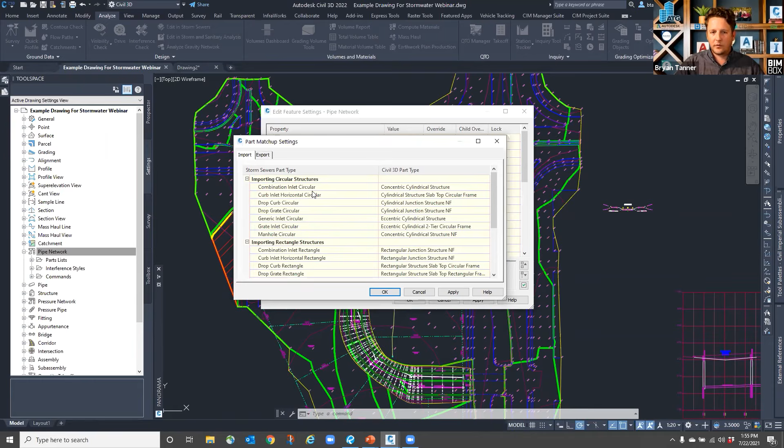So, grate, inlet, rectangular - we have to go through and map these structure types from Civil 3D to Storm and Sanitary Analysis. And then same thing for our pipes. Is it a circular pipe? Well, sure, it's a circular pipe, but sometimes we have elliptical or egg-shaped pipes or box structures that need to be accounted for in our pipe mapping as well. So I tend to go through my export list first, come back to my import tab, and then map those things back to Civil 3D.

I'll say, okay, very few changes there, but I'll use what I've got. Now for the parts list used for migration, what parts list inside of Civil 3D am I actually going to take advantage of? Not just something bland, certainly not pressure pipe. How about our actual stormwater parts list? We want something relative to the type of calculations we're doing.

Just because we called it stormwater does not mean that Civil 3D automatically understands that that is a storm drainage list. We can name it XYZ W12 ABC 123, it doesn't matter. Autodesk and Civil 3D does not automatically assume what we name parts lists and how they should be assigned to the migration of those parts from the analysis software back into Civil 3D and vice versa.

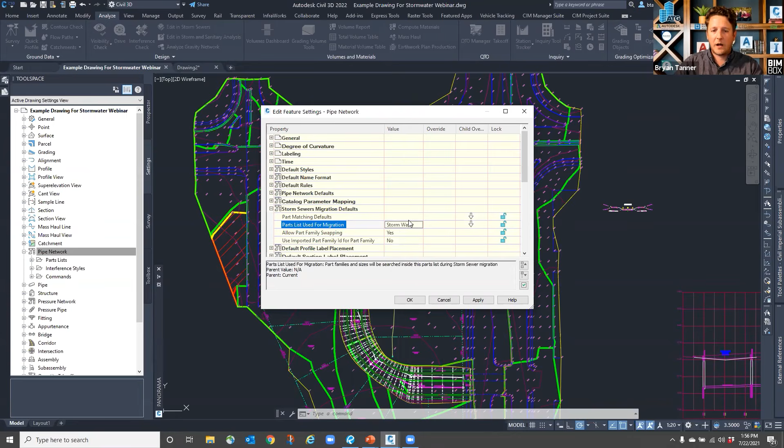So we can part family swap from those settings. We can map them to a particular parts list, and that just makes life a whole lot easier, because if we did have an inlet that was assigned as the outfall for this catchment and brought it into SSA, it allows us to do work in SSA much more quickly, because it's already recognized as an inlet, already recognized as a rectangular structure, already recognized as having an open grate.

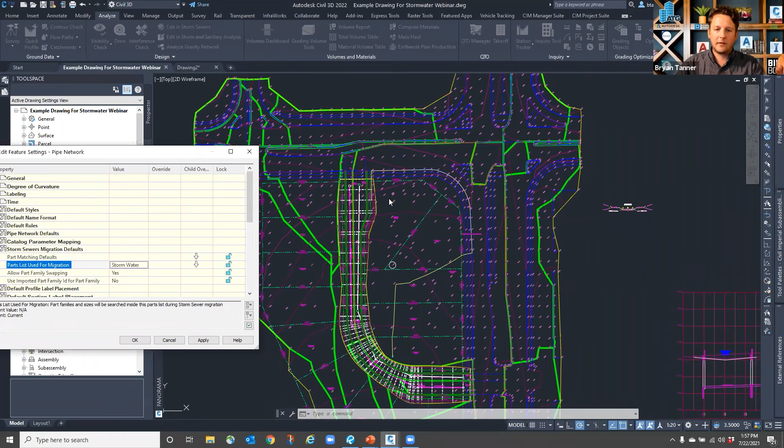We may want to go into the specifics of what grate exactly it's going to have, what its actual open area is for drainage purposes, and how much water it can take on, the rate of inflow. So those kinds of things we may specify further inside of SSA, but we are going to have a lot of our settings already pre-configured, because we've gone through our template in the pipe network feature settings and mapped our storm sewers migration defaults.

And again, that was the purpose of our time together today. It was, how can we set up Civil 3D to do stormwater design and analysis better for our workflows? Did we go through a lot of actual stormwater design and analysis in detail? No. And that's what I tried to underscore earlier on in the webinar - this was not going to be about that. It was about setting up Civil 3D to do those things for you, and how to develop some styles to work to your benefit to expedite that process.

So: parts mapping, watershed extraction from a surface, slope arrows for determining and making best judgment for where your high points or your longest path will be for a watershed analysis, our water drop analysis tool for finding that longest path, setting up those watershed boundaries and the longest path as 2D polylines, so that they can be easily edited and manipulated to work for us if they needed to be combined or simplified.

And then applied to the catchment object - that catchment object having all of that critical coefficient and time of concentration calculation information embedded into it, so that whenever we go to storm sewers, if we go to our design dropdown and launch storm sewers, that's how we're actually going to evaluate those networks and then evaluate those catchment areas. We're just making that process much easier for ourselves.

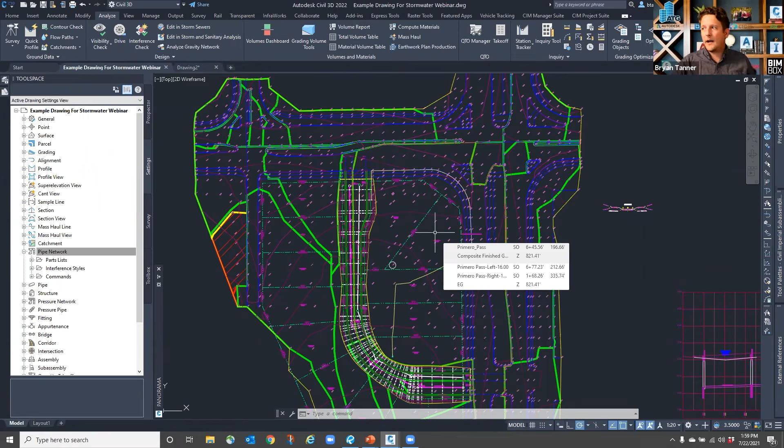Now, with that said, I've got just a couple more details to touch on within the PowerPoint, maybe jump back into the software very, very briefly. But if you happen to have any questions, now's the time to ask, because we will end our session together in the very near future.

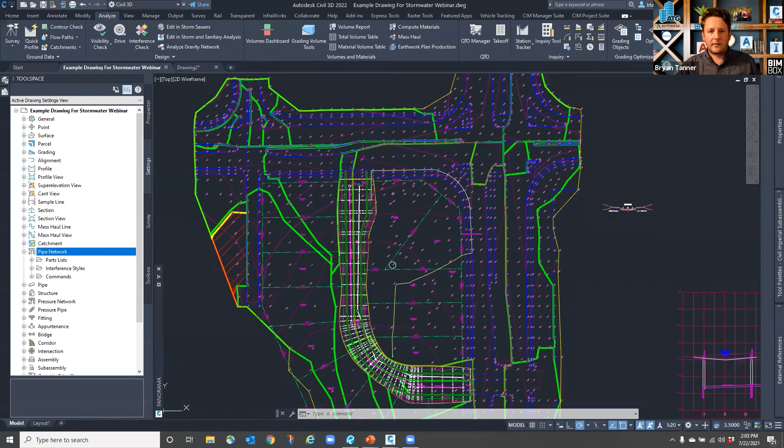I do have that catchment area. If the catchment area needed to update to match the watershed, let's say the watershed went to this corner, I could go through and manually change my catchment area. I just think that with the amount of nodes or vertices that get included in the catchment, you'd be better served by simply pulling those

watershed areas back out of your surface style and reassigning that as the new catchment area. That's my personal opinion.

Joel, I'd love to see part 2 where you take this information into the Analyze Gravity Network tool. I agree with you, Joel. That's something that we might do at a future date. I do know that we plan our webinars several months in advance, so I can't promise that anytime soon. But that is something that I think that we can and arguably could offer as a webinar at a future date.